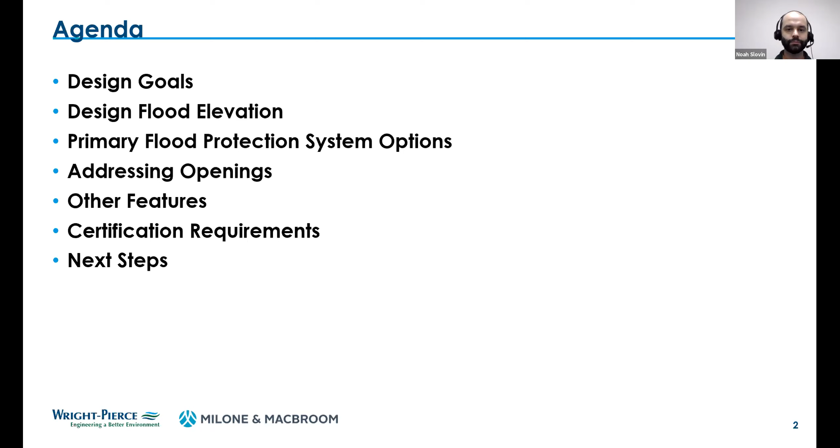So the design goals, as we understand them to be: we want protection from flooding in downtown Damariscotta. But in addition to flood protection, we actually want FEMA certification of that flood protection system and a map change.

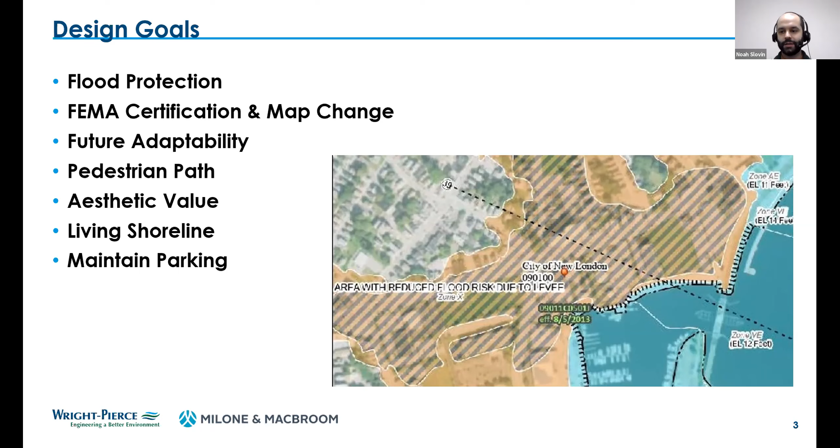And then other features that are desired: a pedestrian path, having it have some aesthetic value, not be an eyesore, incorporating living shoreline features into it as possible, and then maintaining the parking area. So that's the framework as we understand it that we're working within.

So I'll touch briefly on the climate change question, and this goes towards that adaptability question and what are we looking for in the future. The Maine Climate Council has come up with two basic categories of scenarios that they encourage coastal communities to plan for in the coming years: one they call committing to manage, and one they call preparing to manage. Those are the formal titles they've given those different scenarios.

The committing to manage is what they're classifying as this very likely range of sea level rise. In this graph at the bottom, that's represented by those green lines. So by 2050, they're putting that at roughly 1.5 feet of sea level rise along the coast, and about 4 feet by 2100.

The preparing to manage scenario, given the uncertainties that still exist around the science and possible future changes that may result in even higher sea level rise, they're encouraging this kind of prepare-to-manage approach—be ready in the future to rethink your designs and planning to account for 3 feet of sea level rise by 2050 and 8.8 feet by 2100. So these are the scenarios the Maine Climate Council is putting forth, and we want to make sure we're considering those in our planning.

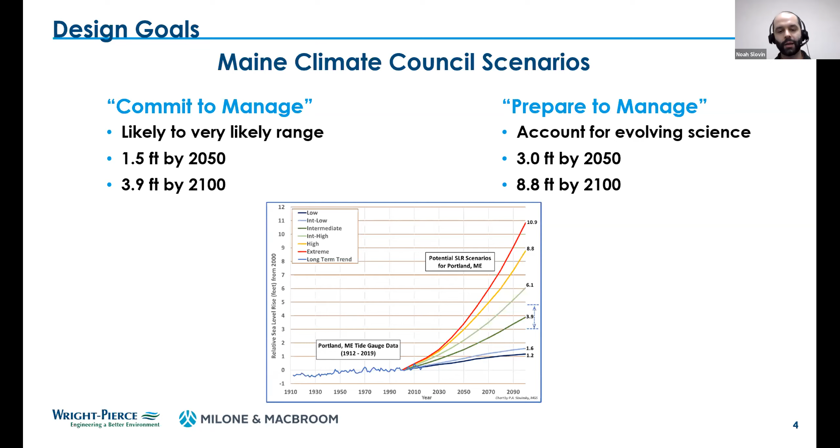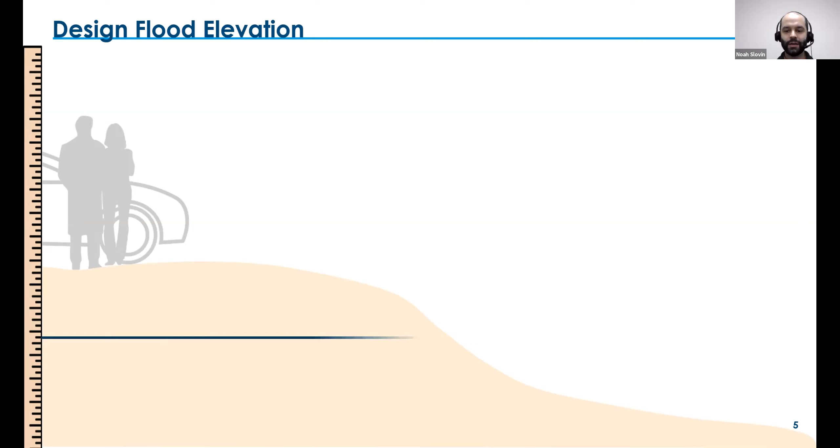So we put together a schematic of what the different flood scenarios might look like. Here we have the Damariscotta parking area to the left with a car parked and a couple people hanging out by the car, and the water is to the right. Right now we're looking at a mean higher high water, the daily higher high tide on average, of 4.7 feet, relative to NAVD 88.

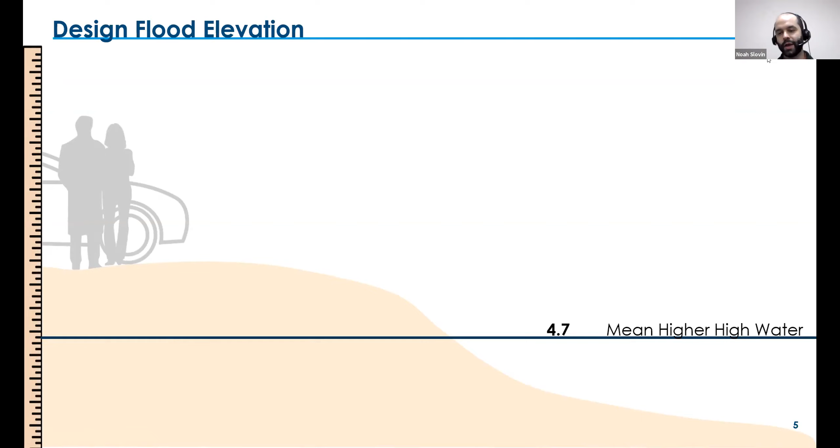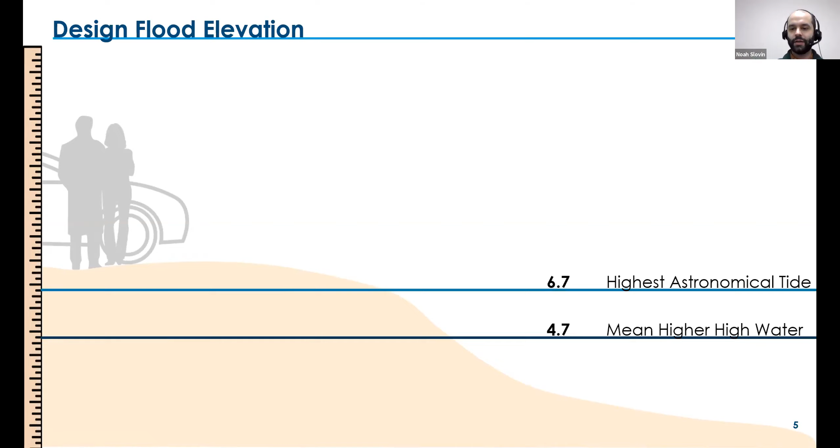The highest astronomical tide is 6.7 feet, so that's the less common very high tides we're looking at. The top of bank is around 8 feet NAVD 88—it varies, it's not a flat bank, but that's the general area we're looking at.

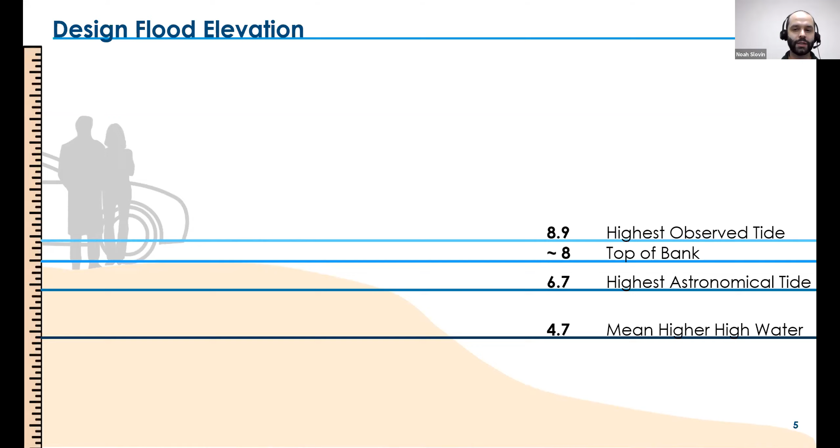The highest observed tide is 8.9 feet. I did look this up—this is from the 1978 blizzard, when that highest observed tide was reached. Some of the recent events like 2018 were about that same elevation of flooding in areas. So these are the observed historical tides that we've seen.

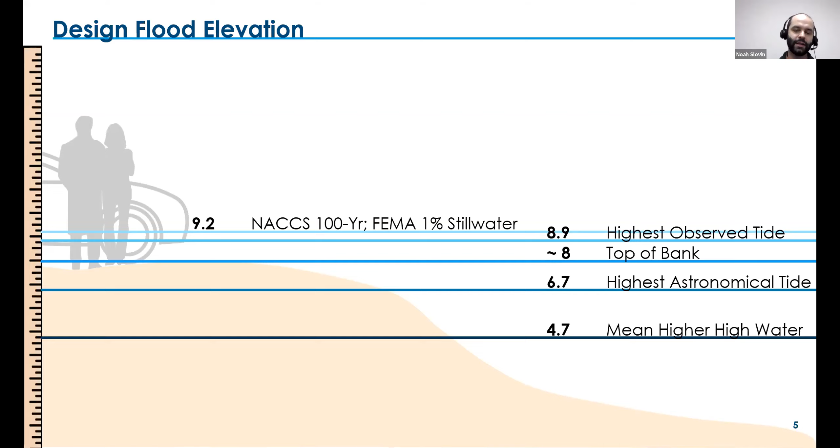Some of the more modeled tides: 9.2 feet is the still water 1% annual chance still water elevation, or the 100-year still water flood elevation, according to both the NACCS data set and FEMA. FEMA puts the base flood elevation, which also accounts for wave action and wave run-up, at 10 feet NAVD 88 in this area.

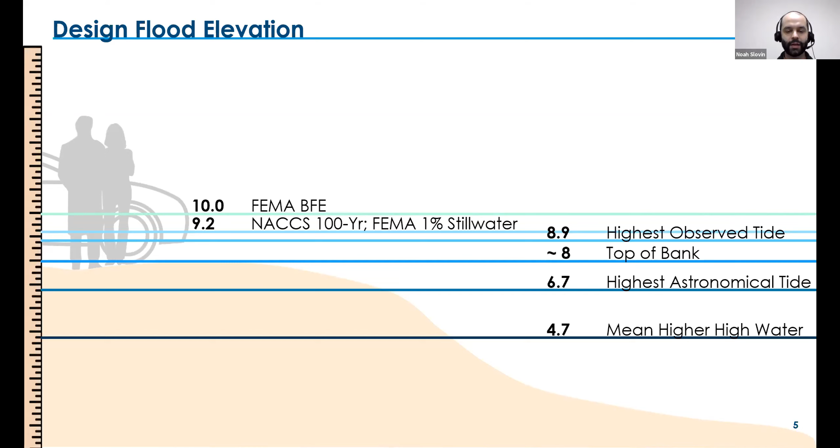And then we have a couple other numbers here. The 11 feet NAVD 88 is the base flood elevation for the nearest coastal transect that FEMA has, which has a site-specific modeled run-up. We thought that might be useful to look at nearby. That's also what you get if you take the base flood elevation and add 1 foot of freeboard, which is what a flood protection system would have to protect against—that's the 11-foot elevation.

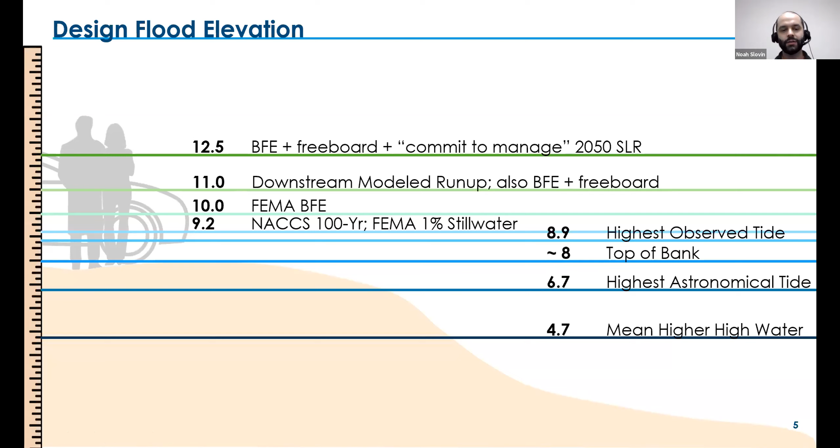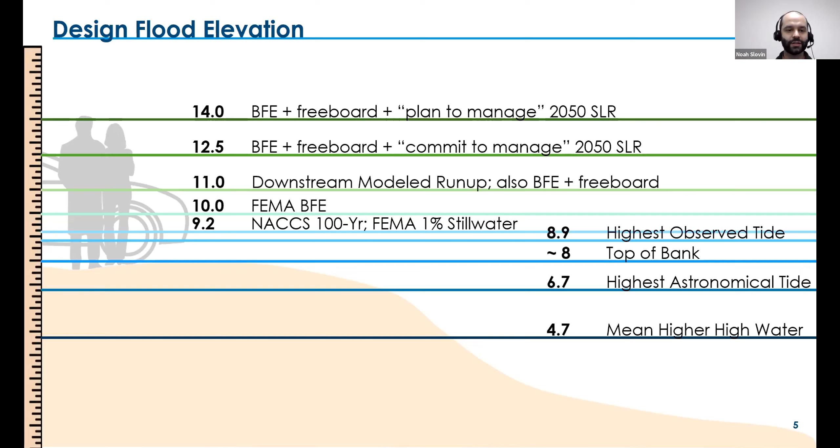And then on top of that, if we add the committing-to-manage sea level rise of 1.5 feet by 2050, we get 12.5 feet BFE. And if we look at the planning-to-manage scenario with 3 feet of sea level rise by 2050, that's up to 14 feet with the base flood elevation. So this is just a range to help get us settled in terms of what things are looking like.

Based on what we put together in the memo, our recommendation for the minimum potential design height would be 12 feet, in order to create a flood protection system that can be certified by FEMA, so it's able to deal with the base flood elevation plus 1 foot of freeboard, and then another foot of safety factor, which can also address some sea level rise.

In terms of future adaptability of a structure to account for sea level rise scenarios, we might go up to 13 feet for sea level rise extension, which is my understanding of our cap in terms of the height of the structure. We might consider having it able to have some kind of longer term extension, looking way out to some of those more significant sea level rise scenarios. So this is kind of what that would look like.

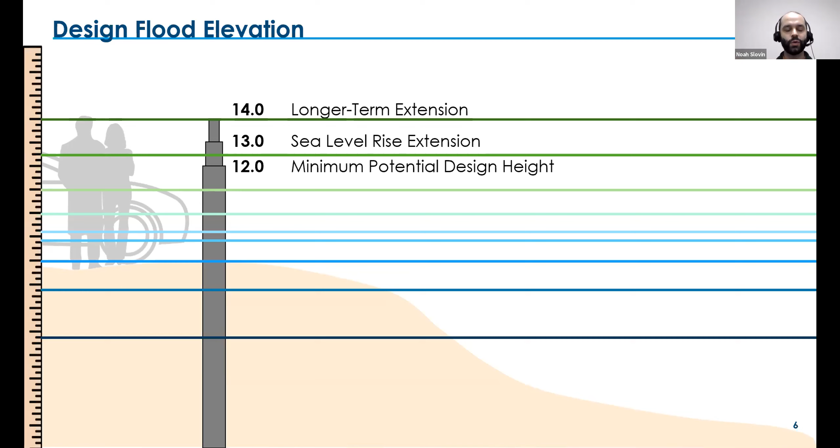So we're looking at building a flood protection system around the parking lot. There are essentially two ways to do this that can comply with FEMA: either building an earthen levee or building a pile supported wall. It would have to protect to base flood elevation plus 1 foot. There's a star next to that because it depends a little on the specifics of an area, and there are exceptions in both directions. Additionally, protecting to base flood elevation plus 1 foot would mean having extra elevation above that to protect against run-up and wave overtopping.

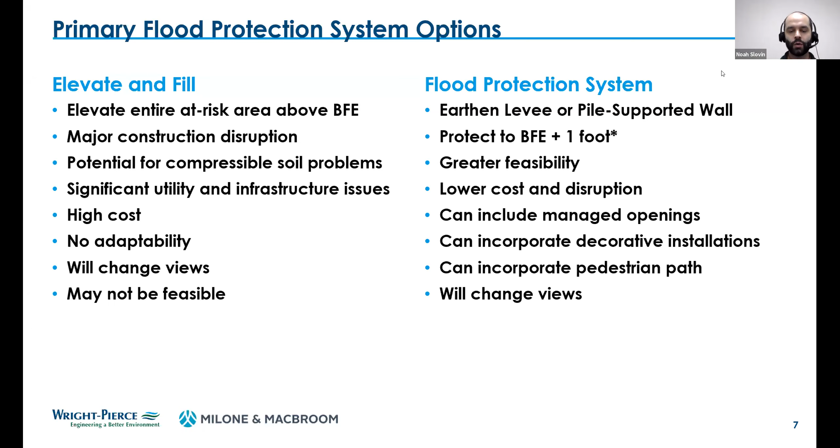So I'll pass it off to Dave to talk through those two different options for flood protection systems. Okay, thanks Noah. And since you're controlling the slides, I guess you'll control the animation. Thank you for doing that.

There are benefits to using this approach. You can incorporate vegetation, planting it in a couple different ways. You usually can't have large trees on it, but you can have different kinds of grasses and decoratives. You can support a pedestrian pathway on it, over it, or next to it, winding over and across it. It can be relatively inexpensive because of the materials needed and the lack of anchoring compared to a wall, which is on the next slide.

You can add sandbags, which you often see in pictures from the Midwest when flooding of the Mississippi River is going on — people running out putting sandbags on top of the levee. And then there's some moderate adaptive capacity.

So those are all the benefits, but there are some very large challenges. The large footprint is really the biggest one. In areas where we've looked at berms or levees, the side slopes are such that the width is so much greater than the height. Even though the height here would only be 5 or 6 feet from current grade, the width would be several times that, so you start to really cut into the area used for parking and recreation.

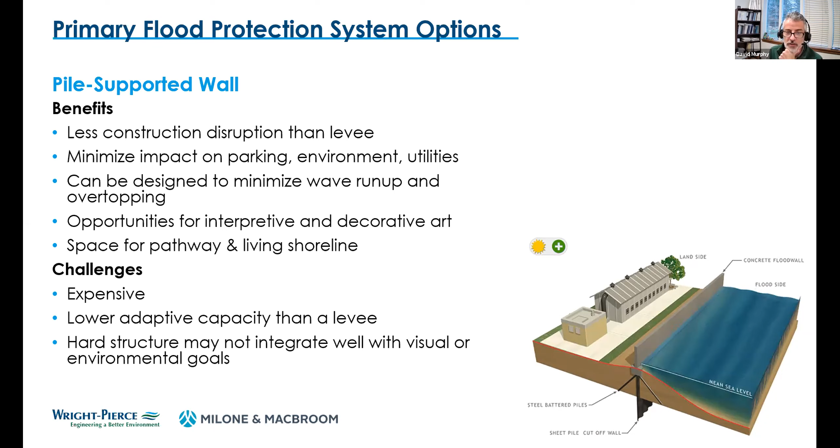So the challenges are typically the cost. Sometimes the design can be tricky because you have to make sure the anchoring is sufficient. There can sometimes be lower adaptive capacity - you can't just balance sandbags on top of a wall, they would fall off. Instead you're looking at other things, like panels that can be added or slid onto rails. And sometimes hard structures just don't look good - it impacts views differently than a levee would.

Openings are a big issue, whether you're using a wall or a levee. Either flood protection system would have an opening, for example at a boat ramp. I think one of the strengths here is that we're not looking at a lot of openings along the road - an opening at a boat ramp is something that could be kept closed more often than one along the road.

But in general, some of the things you'd need to commit to: a flood warning system, which doesn't mean a siren on top of a roof. It means a written protocol in place to distribute messages and make sure someone can always be reached, perhaps someone from Public Works, and it would be their job to go out there - that person would essentially never be on vacation. I'm exaggerating a little, but you get what I mean. The warning system would be very comprehensive, with assignment of responsibilities and an operations plan that enumerates all these points.

There would need to be periodic closures, testing and training. What does that mean? You don't sit around a table talking about what you would do - it means you go out there, drag the closure structure out from wherever you've hidden it, and make sure you can get it out. There's not new weeds in front of it, or a padlock somebody forgot about so now we don't know where the key is. The testing and training would take care of that.

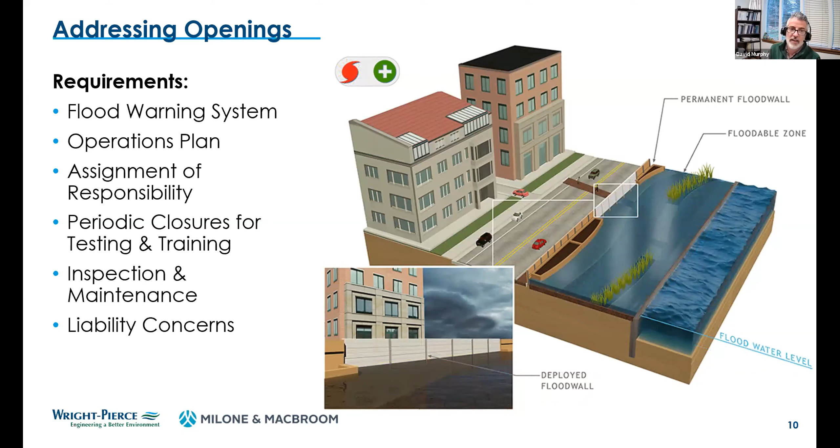There'd be inspection and maintenance. We're involved with one right now, a closure structure in Connecticut, where we're going to help them design some repairs because there's been some rusting of the joints. And then there's always liability concerns - is all this going to happen, and if not, whose problem is that?

These are just some pictures of how one could possibly decorate a flood protection system. Beauty is in the eye of the beholder, so we won't dwell on all of these examples, but you may imagine there are other possibilities if you have a wall instead of a levee as your flood protection system. The one on the lower left, I wouldn't say that's a living shoreline in front of the wall, but it gives an idea of what it would look like to have something partially planted in front of it - if we made it greener with less rock, we might call it a living shoreline.

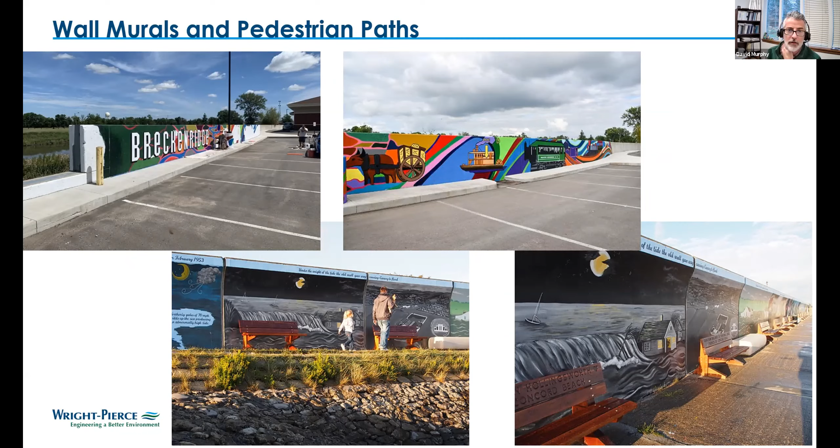This is an example of a walkway - a pretty boring walkway in front of a wall - but what's really important is that the views from this walkway are spectacular. They're not impeded by the wall because the walkway is in front of it. So even though one of us might not design something to look exactly like this, you can see the benefits of having access in front of the wall.

And these are just some of the certification requirements right out of the Code of Federal Regulations. Some of the things we've already talked about: design criteria, making sure there's freeboard, so go a little bit higher than the design flood elevation.

And then Noah, you went to the next one pretty quickly, but I think that's all right. Okay, freeboard closures, protection, settlement analysis, drainage. That's the big thing Wright Pierce will be looking at as part of this project, making sure there's drainage on the land side of the wall.

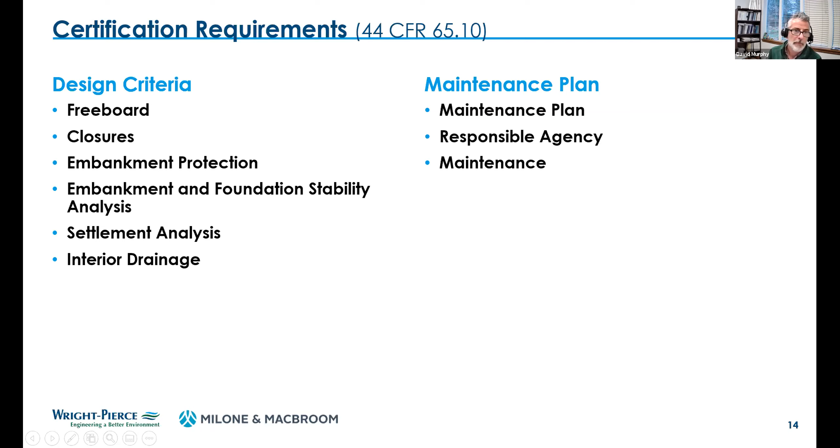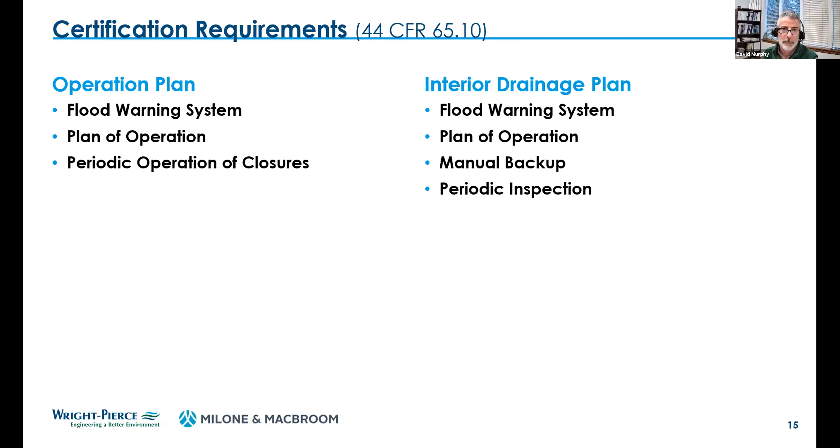A maintenance plan, which we've talked about. Next slide. The operations plan, making sure the warning system is comprehensive and written down, things are tested, inspected, and that the drainage system is operational, with a written protocol for that maintenance as well. That may be it. Yep.

Okay, so taking about 20 minutes for the presentation, we went through it quickly, but we wanted to leave enough time for open discussion. Having gone through the slides, I think we don't need to go through the memo point by point, but we can do that if folks want to look at it.

One of the things that struck me - if you could put the slideshow back up, it might have been the second slide where you showed the wall with the people standing next to it. It had all your elevations for the base flood elevation, the design elevation. I think it's very important in this group to understand the meaning of the elevations we're talking about here. So yes, this slide here.

So I think the design elevation was going to be about 12 feet. That's what we've recommended, or MMI has recommended. I think it's important to compare that to the existing grade out there, which is about 8 feet. So you're talking about a 4-foot structure. If those folks were standing there with a wall, depending on how tall you were, you'd still be able to see over it.

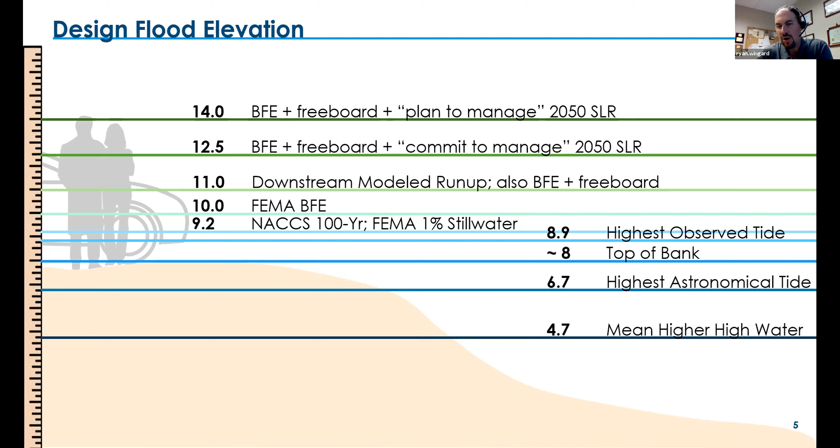So I think that's important to understand and visualize as we're talking about that 12-foot number. Jan, I don't know if we've settled on that 12-foot number, if that's up for discussion, if we want to talk about different elevations. I think that's probably the basis. There's some discussion and further investigation that's going to happen in the next phases. But this here is just to set the direction we're looking at. We're also interested in getting feedback from the community and the committee on their thoughts on these different heights as well.

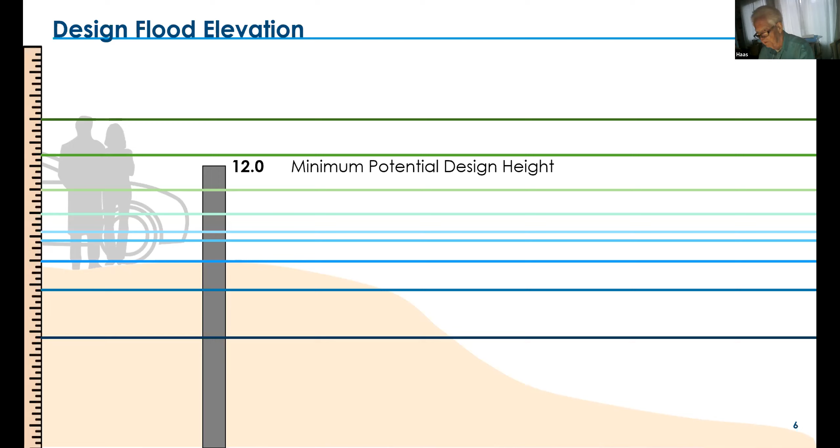Okay, in the silence, I'll reach out and say something. From my point of view, we have another height, and historically it's been spoken of - we call it the flea height. The height at which downtown Damariscotta no longer becomes viable. And you're very close to the flea height.

If you look at the Milone and MacBroom study from 2015, you look at the design elevation considerations, storefront, ground, and door elevations, you'll see that if we get to 15 feet or if we get to 14 feet, that's about as high as we can go before our downtown is toast.

So if we're that close, the question would be, if we're that close to flea height, we should at least keep that in mind as we look at what height we're aiming for. Does that make sense? That's coming down from above rather than coming up from below. What you presented so far is coming up from below. All I'm suggesting is we're awfully close to the maximum we can ever have, as shown by Milone and MacBroom's earlier study. So I just want to put that out there, that you're at 12.5 feet, only a foot to a foot and a half away. So we should keep that in mind as we consider things going forward, I think.

Can I raise the more current issue? Jan, I think it was you that did the videos of it, and that's what we're finding out about how our parking lot is actually made up, and the soup that is at best 3.5 feet down.

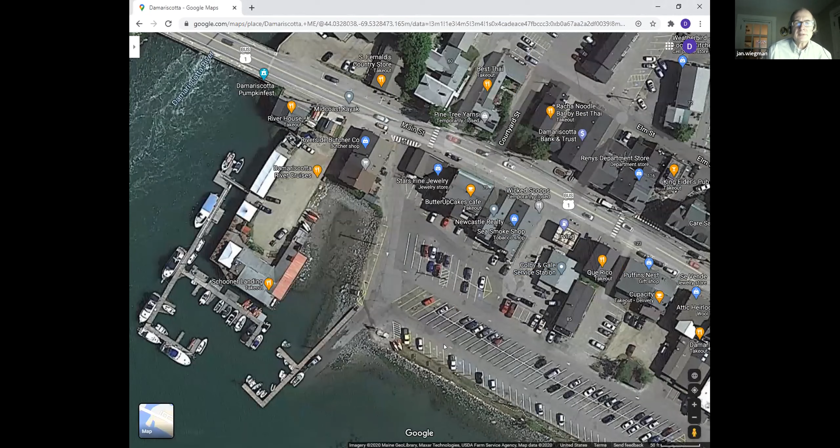So that would be where it says Riverside Butcher Company, that building there. That building, yes.

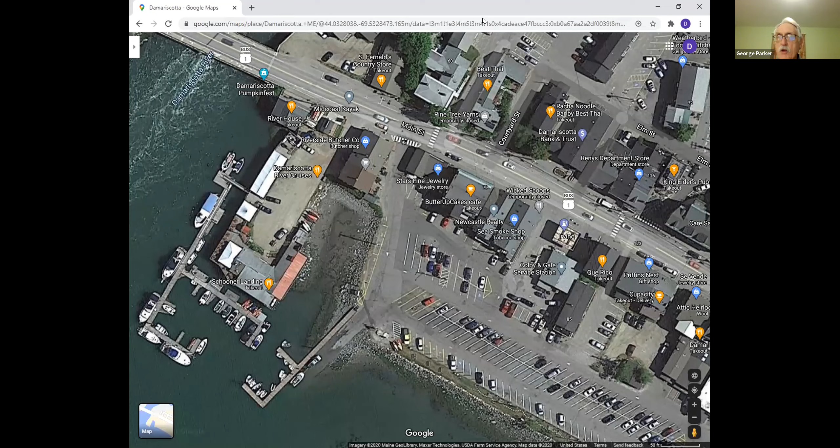In the same light as the boat ramp, why couldn't that also just have a permanent opening that could be boarded up as required, rather than a permanent thing you have to climb up and over? That would be better. The existing plan was, for each building owner, you'd put in flood barriers at each door with a little track, and you'd put in little barriers that come down when needed. Those are fairly common. The only problem is each individual building owner has got to remember to do it.

Now, does that affect the floodplain qualification? Well, it has to be considered as a system. You can't have breaches where some private owner fails, so there has to be one entity that would ensure the integrity of that wall system.

So the town would cover that. There was a fair amount of discussion a while back about passive barriers that would be self-implementing. Has that discussion gone away? I don't think it's been finalized yet on what type of system we could use there. Passive barriers are certainly an option, but with the freezing and other actions we have here in the Northeast, we have to be a little more careful how we use those.

At that boat ramp, there'll be a lot of traffic over it, and a lot of dirt could get in there that could interfere with it, making it a higher maintenance item. But it's certainly worth considering. I think you had a price tag of 250,000 or so for a device like that. Maybe it isn't practically worth it if the price and maintenance outweigh other options. I just wanted to know if we can put that one to bed or whether it's still hanging out there.

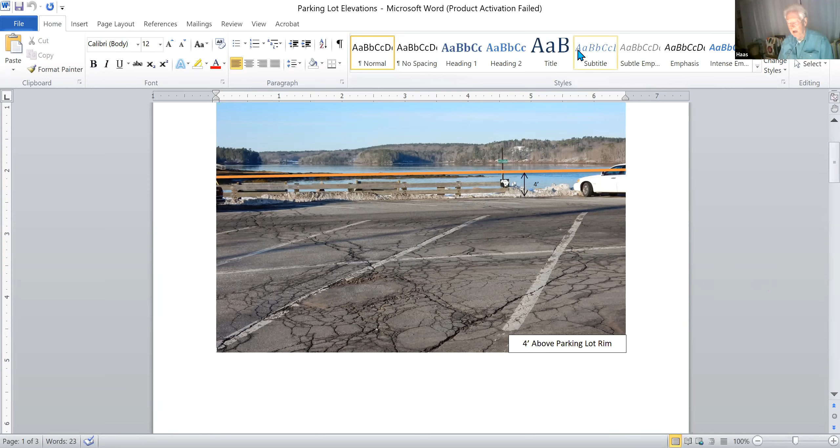So Pete and David, over the years, when you do have the vegetation on the seaward side and you do have a flooding event, what sort of damage to green spaces at parks have you seen, or are things pretty well built that they would withstand the forces that a flood would bring?

Having to deal with that is not new to us already, in terms of that park strip and salt water and various assaults on it, all the way up to dogs. And there is some maintenance involved with it, and that would continue no matter what side of the wall it's on. Yeah, you're right, Dick. I'm getting trees to grow there, we've tried over the years. Oaks are about the only thing that survive at all, and even then, most of them eventually die. The grass, I think we have to replant.

Every other year or so, but it's a struggle when you got salt environment, no question. They're gonna need to build it with salt-friendly plants, right? Yeah, that's a good point.

I think that's the rethinking you have to go into this, thinking it's not going to necessarily be a green strip of grass with 20-inch oak trees growing there. That's just not viable for a saltwater oceanfront park or waterfront park.